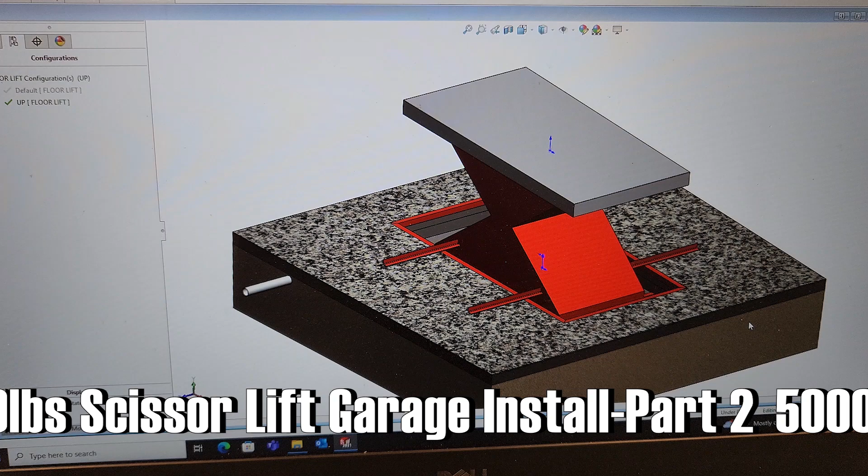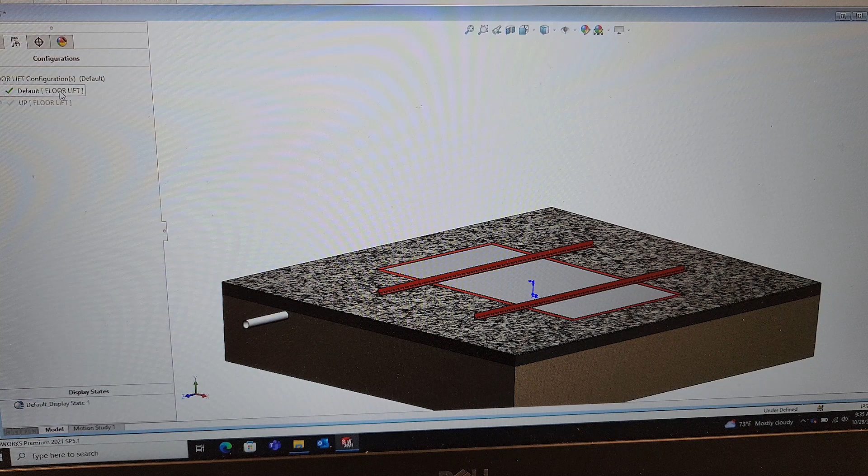All right guys, here is my model of the floor lift. So that's when it's up. You can see the different layers of the concrete, and I'm just gonna do like a floor epoxy. That is when it's down on the floor. The crossbars there represent the temporary bars that I'm gonna have going across, and you can see the pipe here that'll run in there.

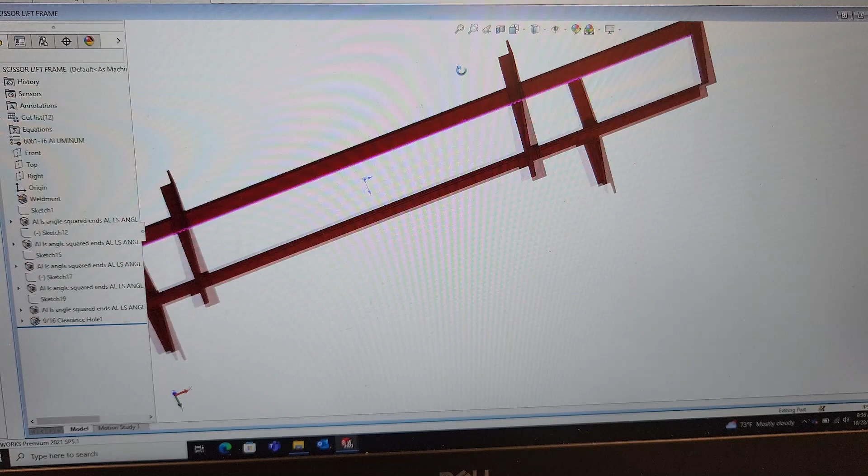So here is the framework. Wish I had my mouse because this would be a lot easier. So that's the plan, basically just this frame going around. All right, let me zoom in here a little bit. So basically these are the temporary crossbars, and we got the framework.

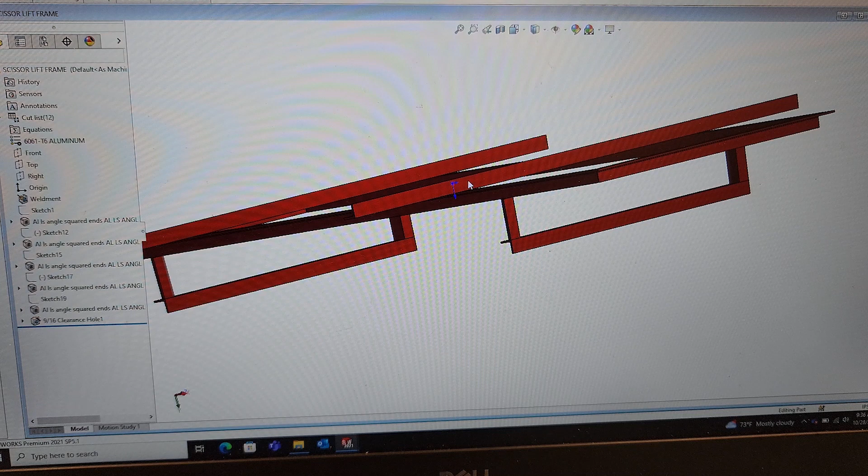I'm just gonna go down and over with a couple of these bungs welded on there, and then I'm probably gonna go around it with a frame. I'll just go pick up some 3/8 or 1/2 inch re-rod for a little extra concrete reinforcement, run a couple rings of that around, and that'll be it. Pretty simple - just down and over, and a couple bungs that this thing will bolt to, and we'll go from there.

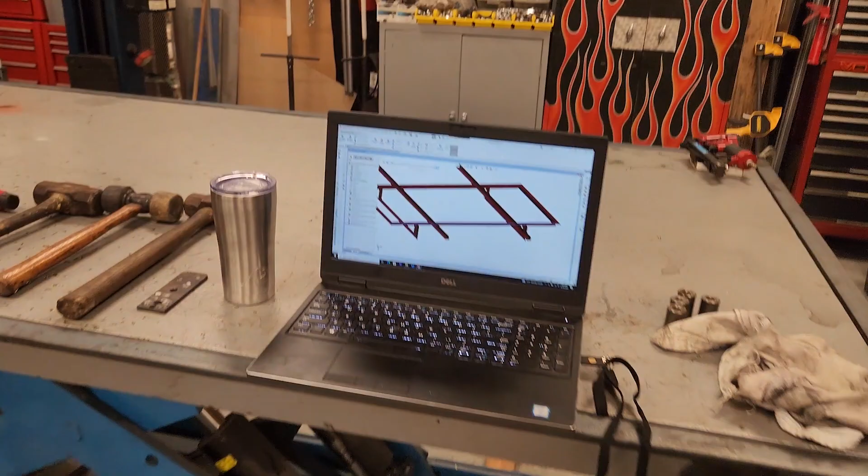I got the frame done last night and gonna get this knocked out today.

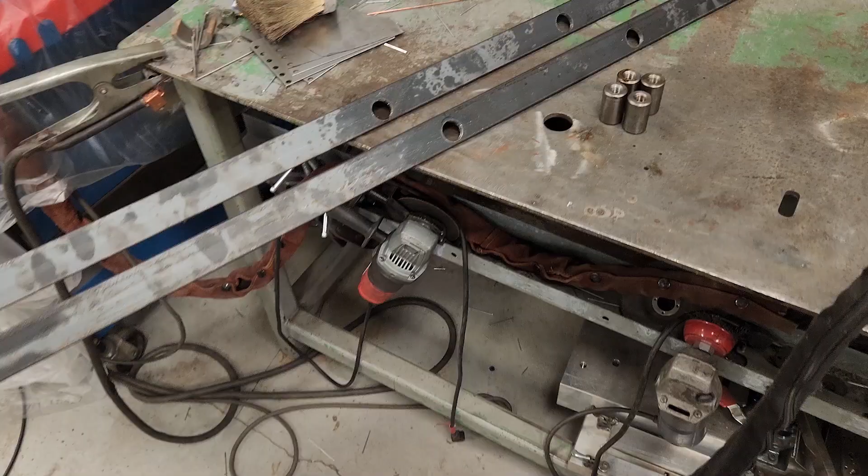I got these cut, gonna weld these on. They're gonna be welded underneath like that, so I'm just gonna TIG weld them. I still got my machines covered up from the hurricane - we covered all this stuff up just in case the roof leaked again, which it's leaked in the past. So anyways, I'll get these welded up.

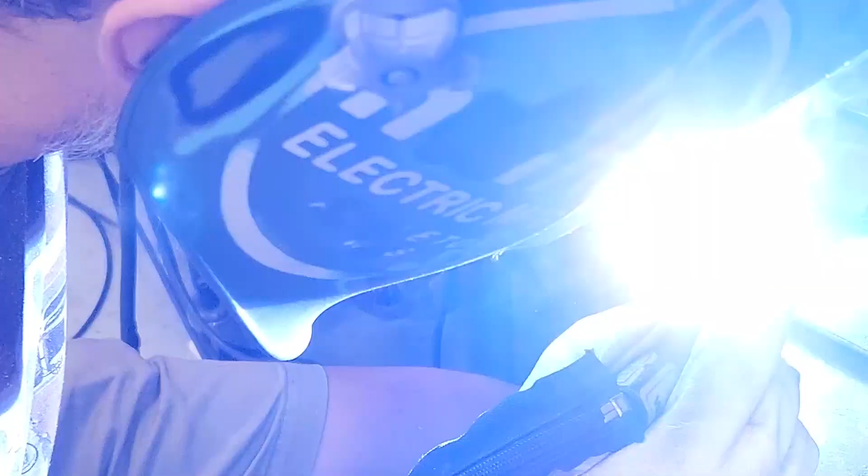Not the best, not the most pretty. Since it's going to be buried in the concrete.

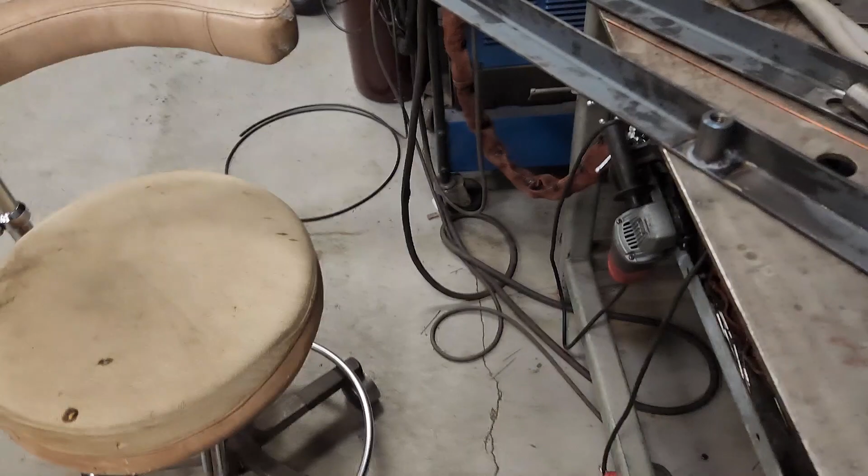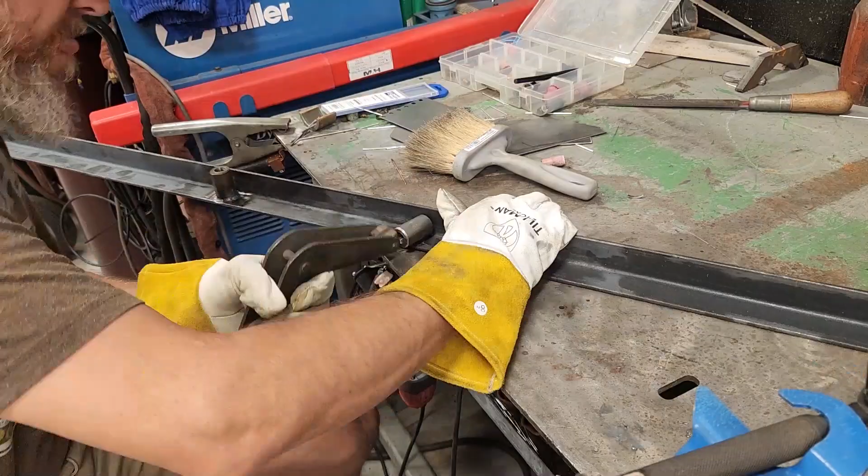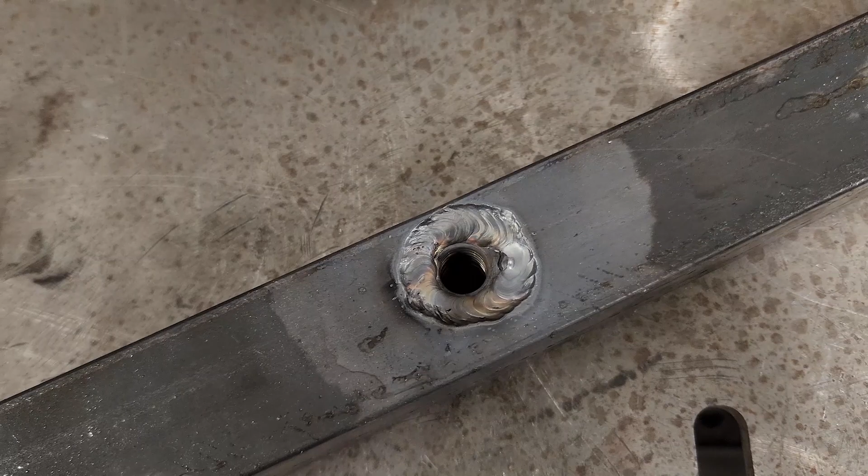All right, compressor's running, but just kind of plug welded the ends there. It's not the most beautiful, but nobody's gonna see it. And then of course welded up those guys. Again, kind of rushing the job here - it's all getting buried in concrete.

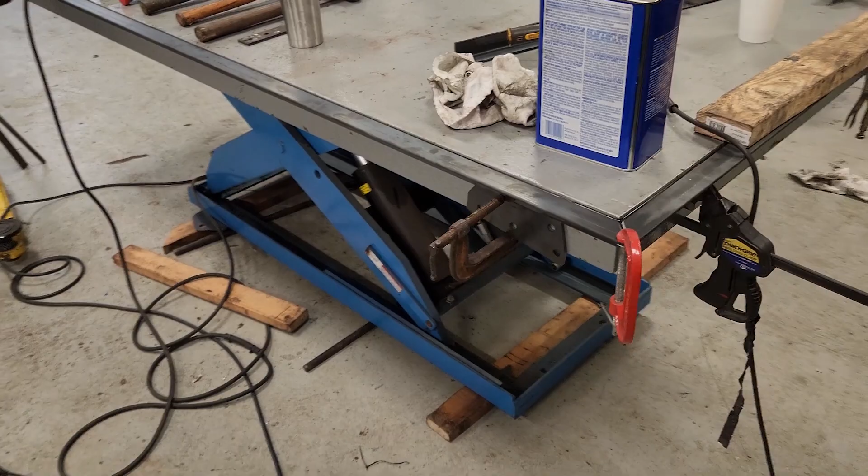All right, I just gotta make a couple down pieces, lower this down, and weld it up. I'm ready to weld up this frame, holding the corners, got it all leveled out here, real perfect. So I'm gonna get that TIG welded up. I could MIG it, but I'm just gonna TIG it because I like TIGging better. So let's do this.

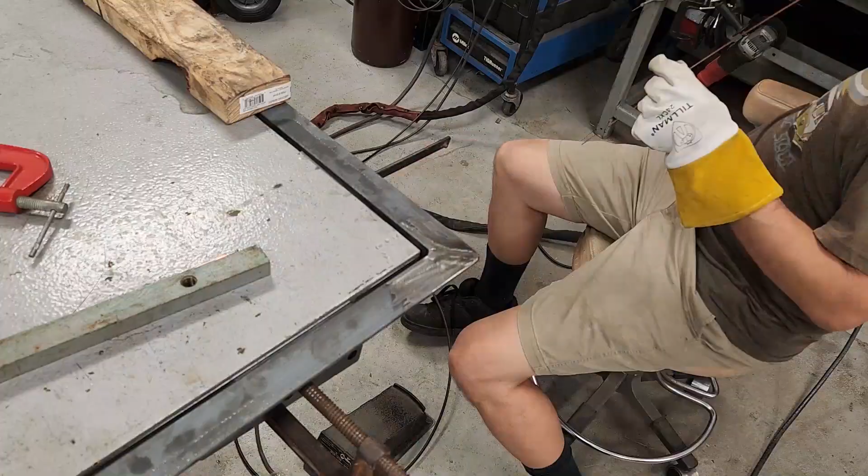So I got the corners all dressed up, I'm gonna grind those down. Just a little weave on there, just fill in any little extra.

Eric's bolting the bottom cross beam on. And then what I just did is just took scrap of some bolts, old bolts, and some old metal scrap to use as like a re-rod. So this is gonna be bolted up like that, and then this will all get concreted into the 5-6 inches of concrete on the slab that we pour, so it'll be good to go.

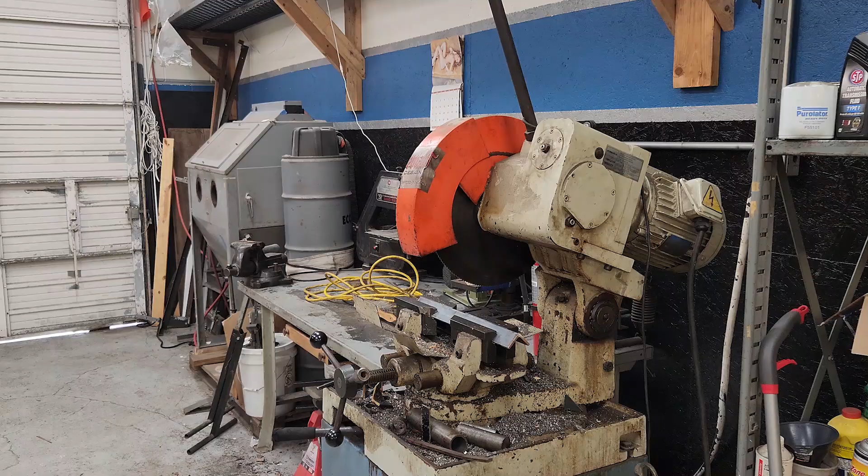I'm videoing you, you're gonna be on YouTube. It's my buddy Eric, everybody. He's bored as hell, no job Eric - I'm just teasing. He's home from Thailand and bored out of his mind, so he's over here helping me out today.

Yeah, my vagabond boy. Eric used to work for me, that was probably what, 15 years ago at Detroit, or what the hell was the name of the company? It was Deviant Design.

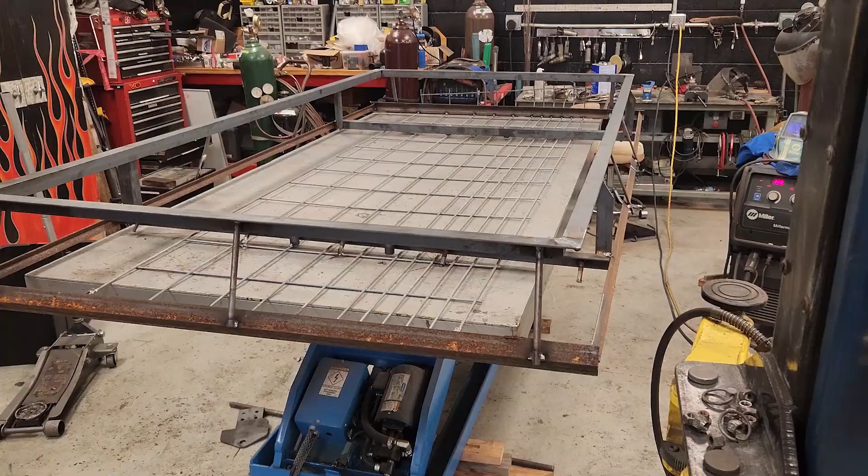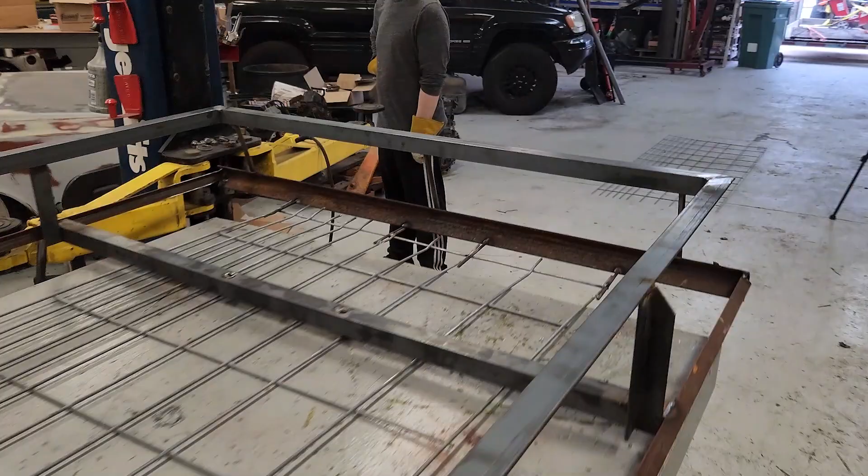Yeah, that's the part you gotta watch the fingers. Alright, she's all welded up. I had some of this wire gate stuff that we threw down, which is about 2 inches, so it'll be right in the middle of the concrete. I kind of messed up the first little thing I had on there, so we had to cut those off, and then we just used angle iron and scrap pieces of metal we had laying around. It's all going to get buried in concrete, so it looks pretty good. Good job, Eric. And we're gonna throw this on the trailer and get it home.

And I rented a concrete saw in the back of the trailer, so we'll get that cut tomorrow, hopefully.

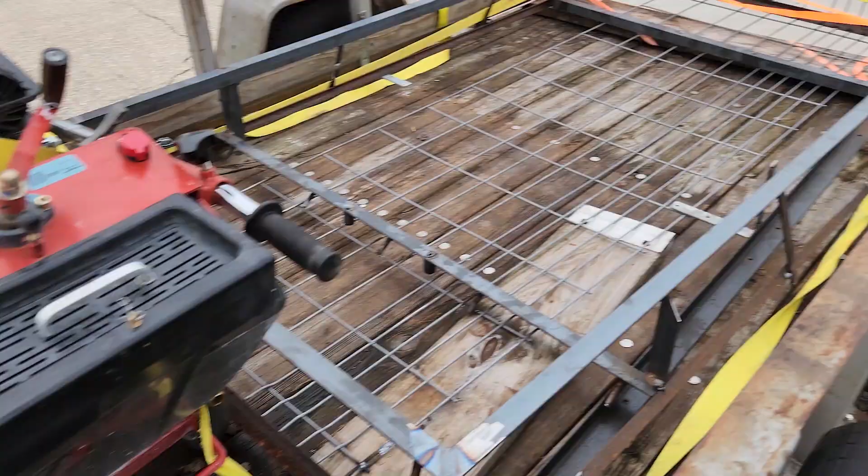Oh yeah, okay, we got it all loaded up in the trailer here, heading back to the house. There's the frame, there's the saw. I'm gonna hit the road.